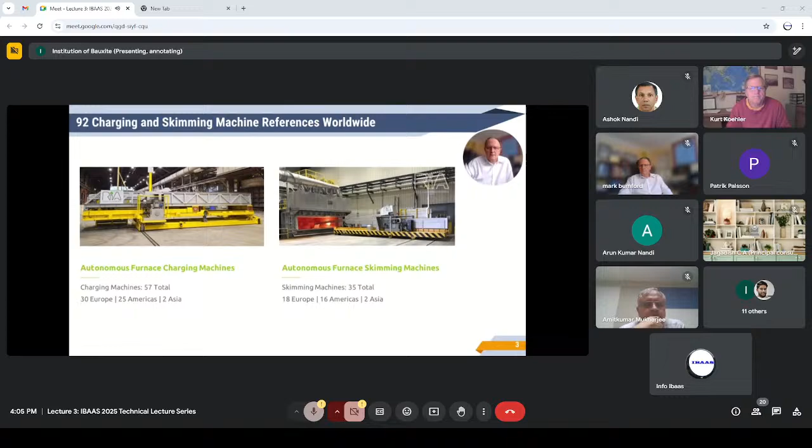Notably, some other large customers include Novelis, which is a downstream entity belonging to Hindalco, and Hindalco itself. We have supplied a furnace charging machine to the Hirakud plant, which next month will be installed and commissioned in the DC4 cast house. That's a swiveling charging machine capable of charging 12.5 metric tons into a furnace in less than 90 seconds.

Let's look specifically at the technology and how that relates to improved efficiency and safety. First of all, there has been no operator cabin on our charging machines since 2014. So for 11 years now, we've been supplying these charging machines completely automatic, without any operator cabin on the machine. That way we remove the operator completely from the dangerous and risky charging cycle, where there's always a risk of a potential splash, exposure to heat, or worse still, an explosion.

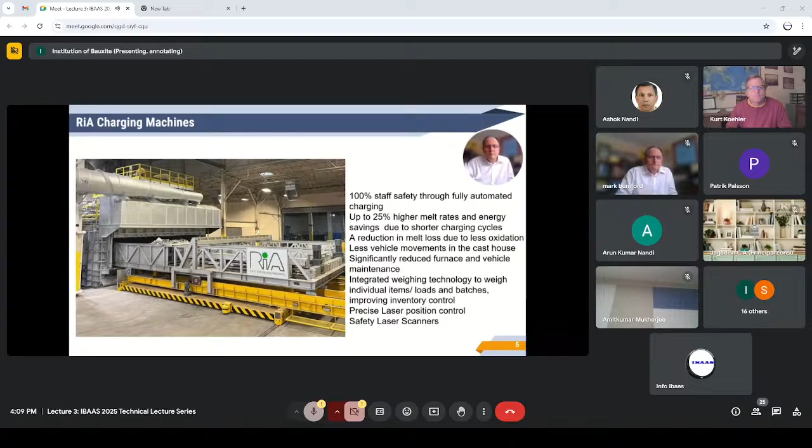Because the machines are automatic, they need to know where they are in the cast house in relation to the furnace or furnaces. So we have laser position measurement on the machines that determine where they are in relation to the furnace, so that we can ensure when we enter into the furnace, we're not touching the sidewalls, we're not touching the refractory. These are completely non-contact. We have safety laser scanners on the machine, so as we move up and down the cast house floor, if we approach an object or another vehicle or a person, the machine will slow down and ultimately stop if that object doesn't move from the path of the machine. So complete safety.

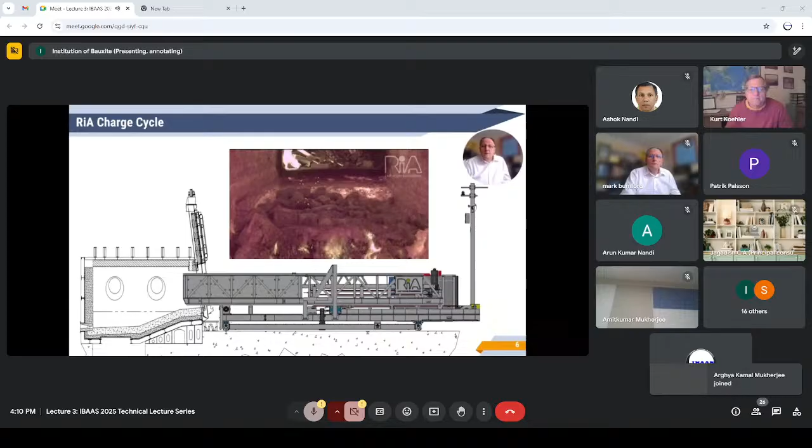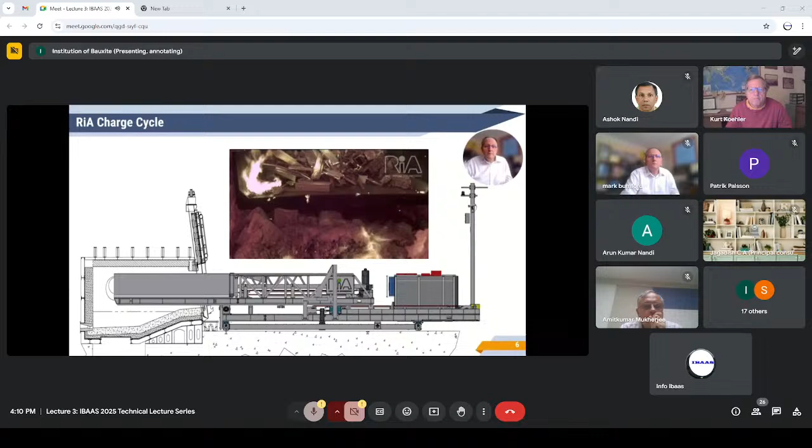This video here and the graphic are synchronized together to show you what a typical cycle looks like. The machine moves in front of the furnace, it sends a signal to open the door, it extends into the furnace to that 2/3 length of the furnace. Pusher plate moves up to a predetermined position, stops, and then our container retracts against that pusher plate. And as the container retracts against the pusher plate, the scrap's being pushed off into the furnace from the back all the way to the front. And we can do that always in less than 90 seconds.

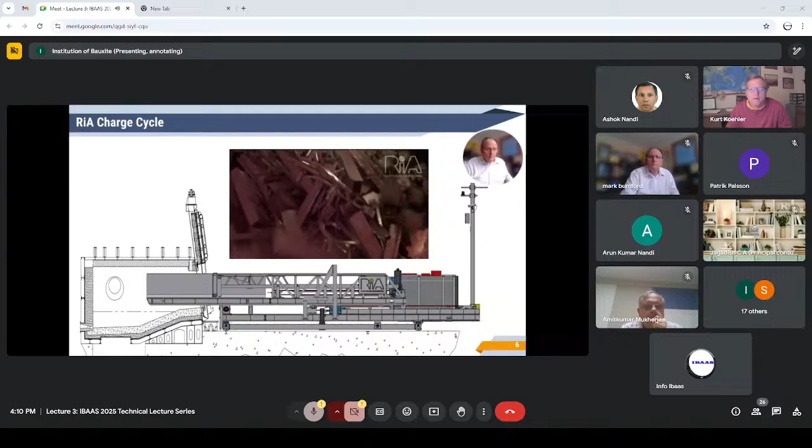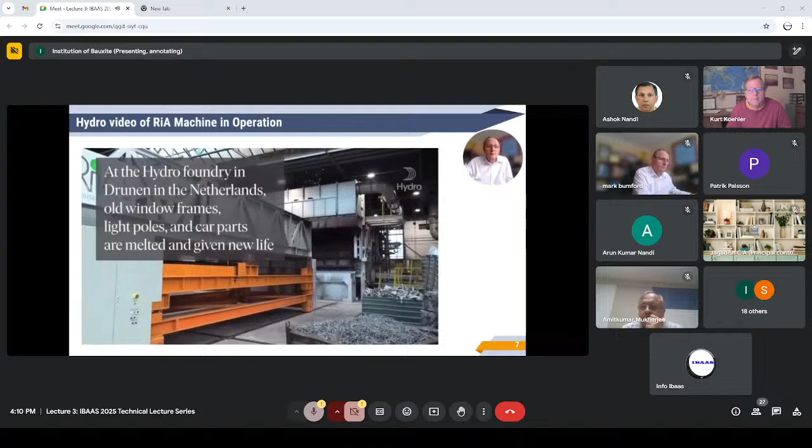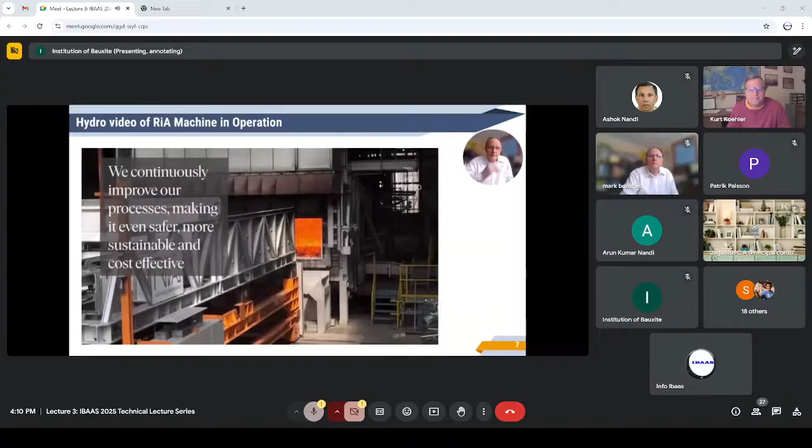Rather than showing you a graphic in operation, the important thing to note here is this is not a video made by RiA. This is a video made by one of our customers, Hydro. So the words that Hydro use are Hydro's words, not RiA's. So here they're talking about a circular economy. They talk about efficiency. They talk about cost savings, sustainability through use of that machine.

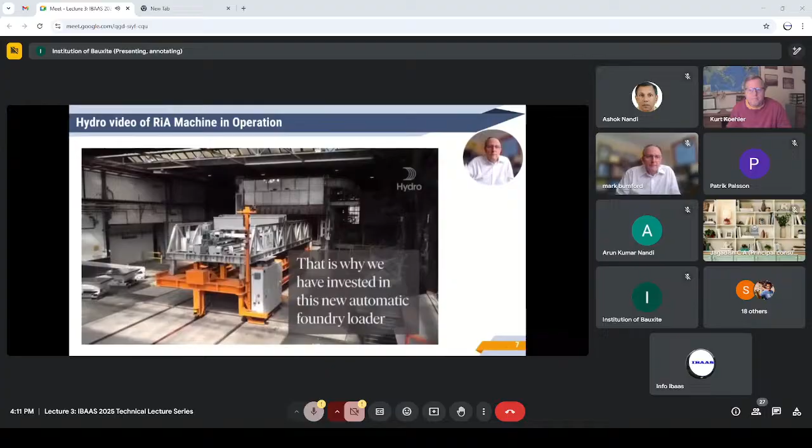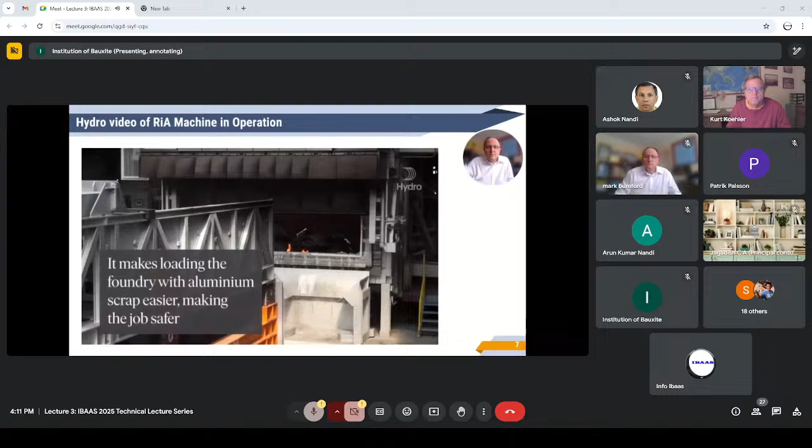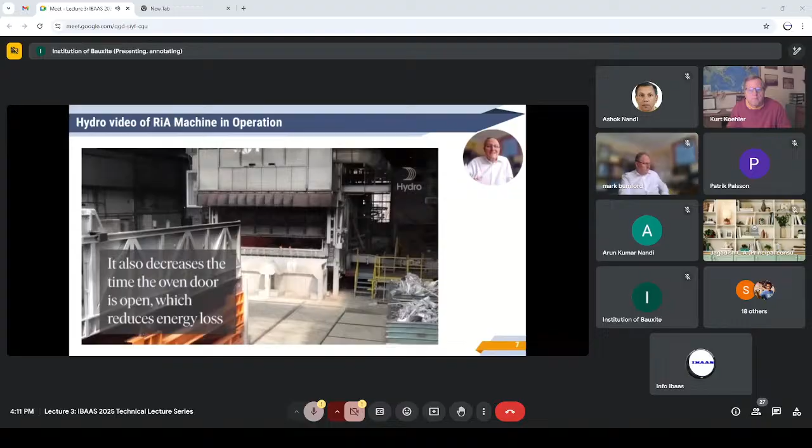Again, you notice that there is no operator cabin on the machine. It's fully automatic. We provide a remote operator station, and in this case the operator has a single push button that activates the machine. The machine moves to the furnace, sends the signal to the furnace controller to open the door. When it receives a signal back that the door is open, the machine extends into the door, into the furnace, delivers the load, retracts back out and returns back to the loading position, all fully automatic without further interaction from that single push button.

Just to show another application in operation, real-time video. If you want to time it, the cycle from when the charge container starts to extend now to when the container is back to that home position and the machine starts to move away from the furnace is 45 seconds. And in that time, this machine is capable of delivering 15 metric tons into the furnace. Now, if we can do that and we deliver the load evenly from the back to the front, we get that shallow scrap pile. We don't have a heap in front of the burners that are blocking the heat to the rest of the furnace.

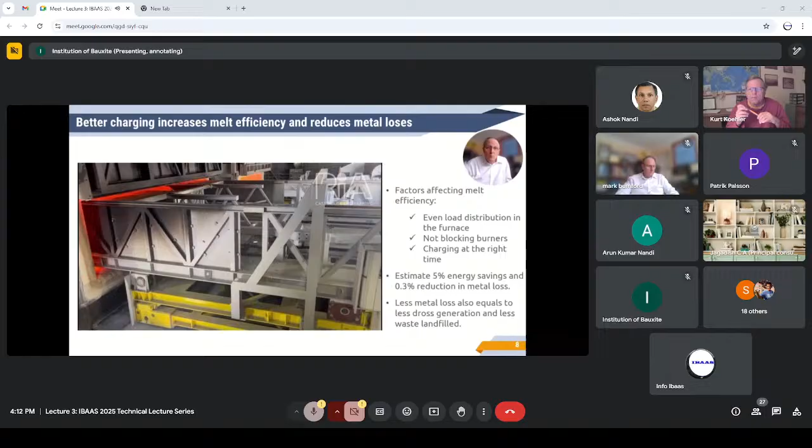We can use cameras inside the furnace, which I'll come to in slides to come, to actually determine when is the optimum time to make that charge. If we can do that, we can minimize the number of door opening times. We can minimize the total amount of time that the door is open per cycle. So we can keep heat in the furnace. We can reduce your cycle times. We can save energy. Here we estimate 5% energy savings by minimizing the door opening. A reduction in dross generation of potentially 0.3%. So if you're generating 2% dross typically, we could expect to see that fall perhaps to 1.7% just by minimizing that door opening and minimizing the amount of oxygen that can get into the furnace.

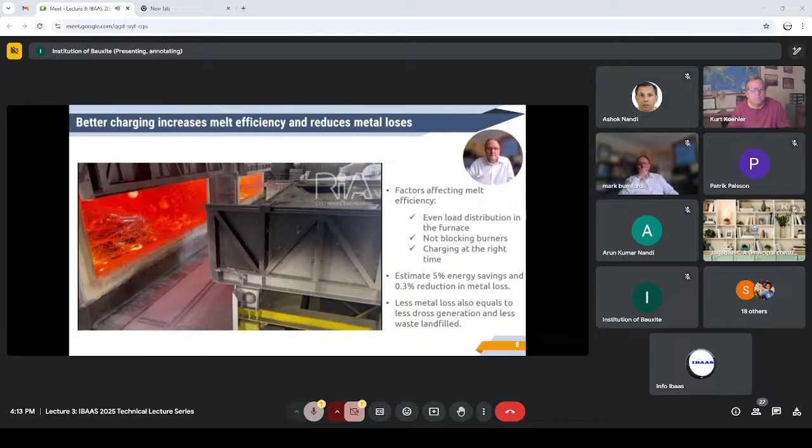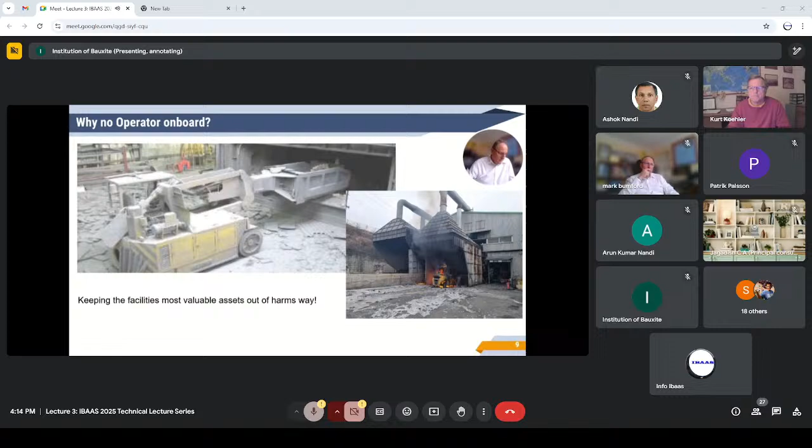I'll now talk about cameras, and then a little bit later we'll come back to skimming, but cameras here actually tie in and relate nicely to furnace charging and how we can take that automatic cycle from being automatic to autonomous. First thing to note is that Fioscope, since we made that relationship quite formal, the relocation of the business and for Ria to take over the sales of the Fioscope technology, we've sold 107 of those cameras worldwide since 2022.

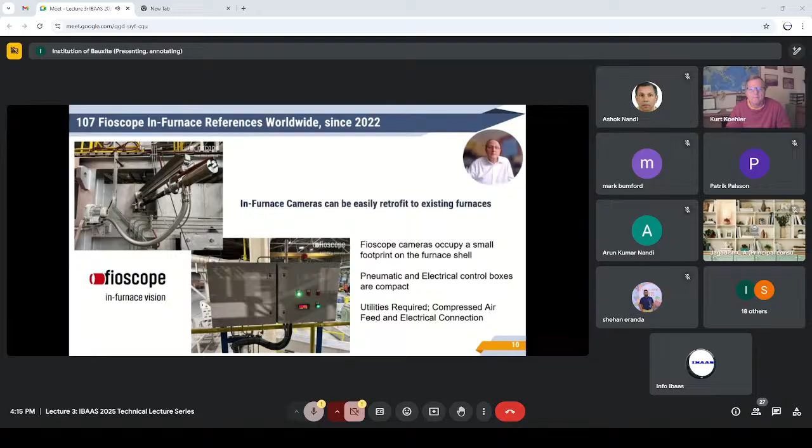Other significant customers include the likes of Hydro, where we secured one frame contract to equip every Hydro cast house in Europe that didn't already have a camera on their furnace. So at that time, 8 cast houses invested in Fioscope technology in different countries throughout Europe.

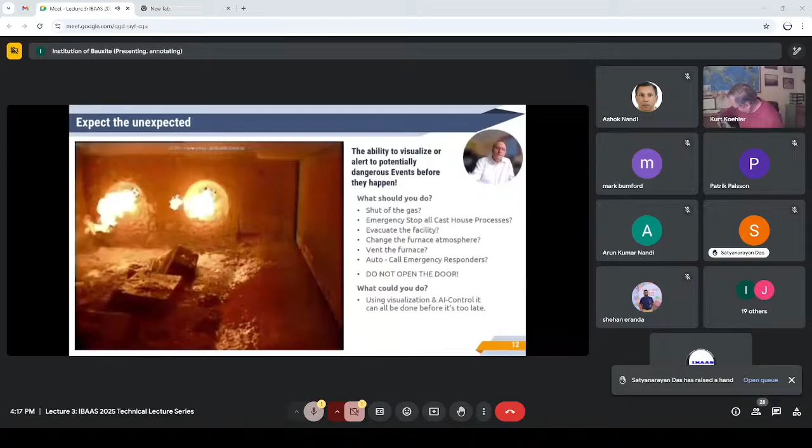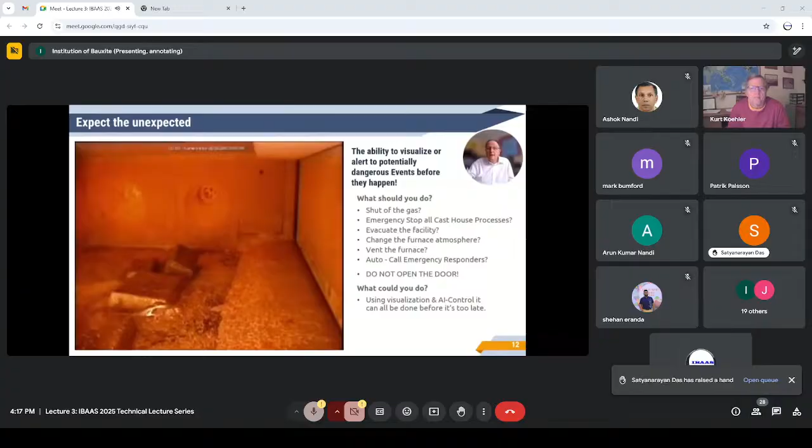This video was captured from our very first installation. The installation occurred in 2014. This video was acquired in 2015. We had a video storage facility, so we didn't know what was going to happen, but after the occurrence, we were able to look back to see why. You can see some bubbling just to the front right of that sow in the furnace, and that's moisture escaping from contraction within that sow.

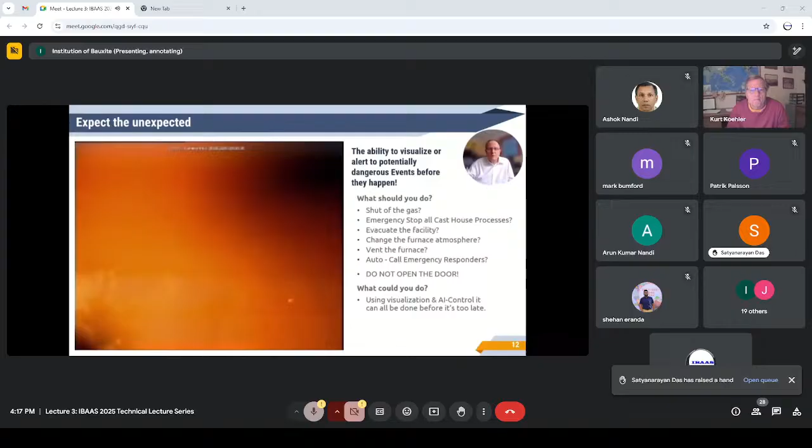And at a certain point, that moisture path becomes blocked. The theory is that there was a rapid rise in volume there and expansion, and that caused the explosion. Now, we were quite lucky, the customer was quite lucky, that that was a mild explosion. It was a loud bang, but the furnace wasn't damaged. Nobody got hurt in that particular incident. But it got us thinking, if a camera inside a furnace can see events, can you use that image to make decisions and take actions and maybe prevent such events?

Now, what was clear in this particular case is the image which was displayed on a monitor in the pulpit in the cast house had not been observed for certainly more than 10 minutes when that bubbling was occurring. Otherwise, the operators may have tried to take actions to prevent that occurring. What could they have done?

They could have certainly evacuated the area. At that time, nobody knew how significant the explosion was going to be. They certainly could have shut off the energy supply to the furnace so that there was no further heat being put in there. They could have called the emergency services just in case. So there were a number of things that could have taken place that may have prevented that incident from happening, or certainly reduced the risk of it being any more significant than it was.

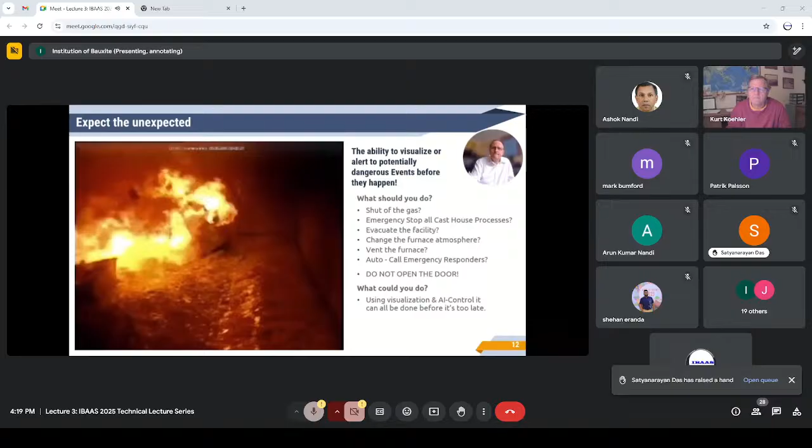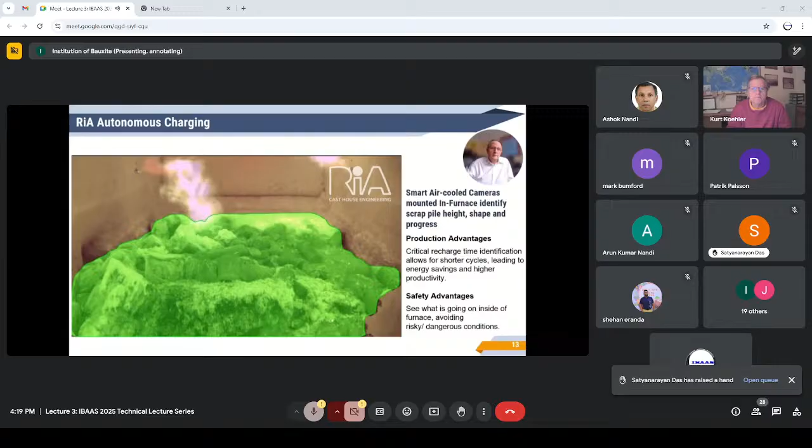Fast forward to today, this is what we use that camera technology for. So the green polygon that you see is the intelligence system identifying where the solids are inside the furnace. So it's ignoring the door and the wall and the floor. It's ignoring the burner flames. It's just tracking the polygon, the shape of that scrap pile.

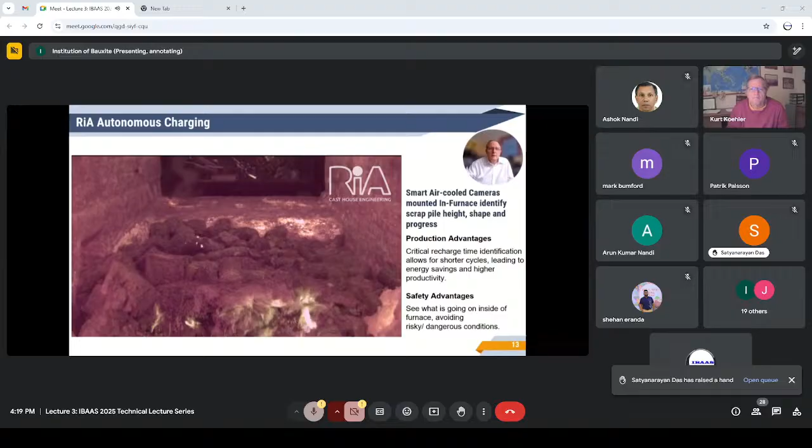Now we have a traffic light system. We're at the end of the cycle here where we're ready to receive the next charge. That's what the green light means. We're ready, we can go, we can proceed. So the door opens, here comes our charging machine, and in real time we just show that charging machine coming in and delivering the next load.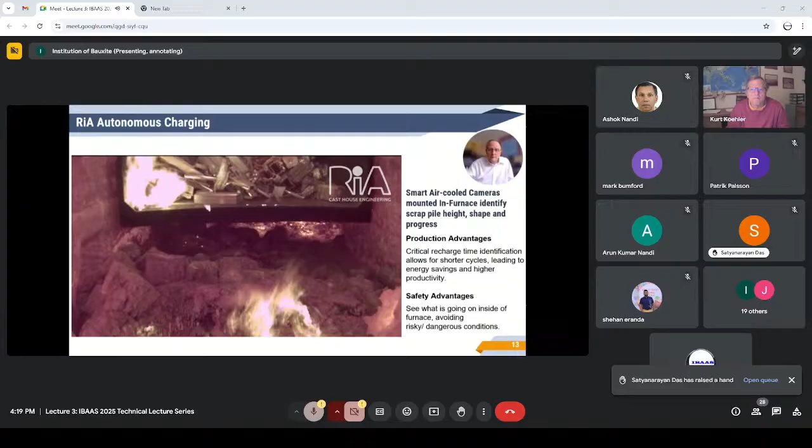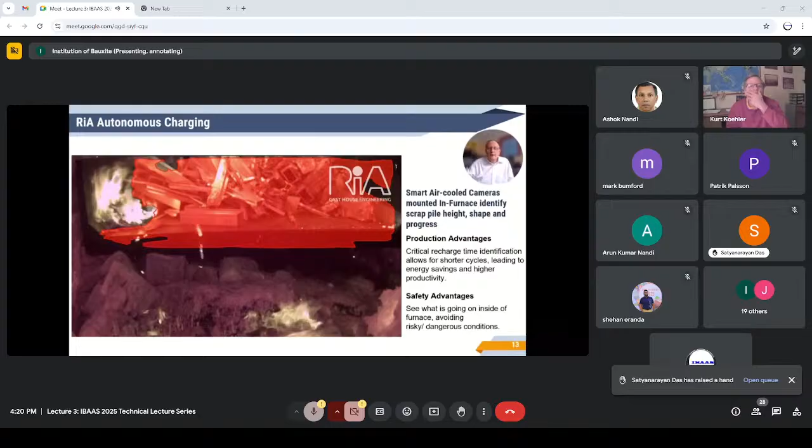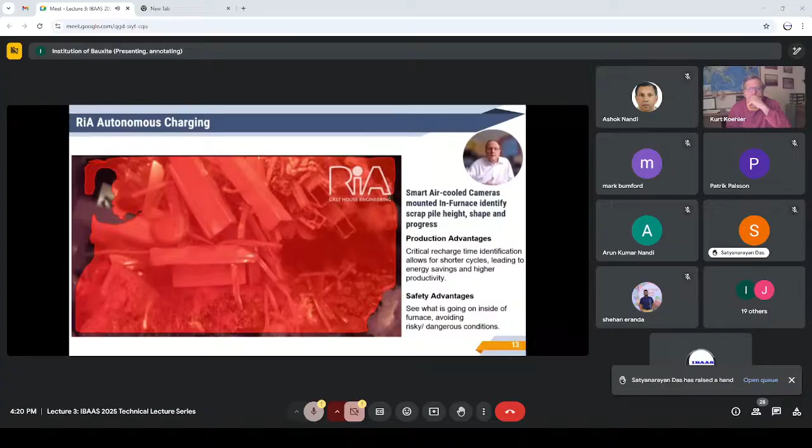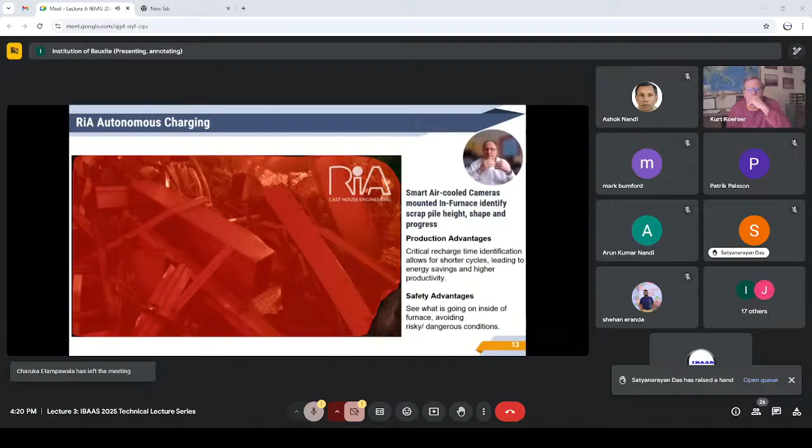So the first thing, as the intelligence is still rolling, it identifies the solids that are in the scrap container, links that to the solids that are in the furnace, and we now have a red polygon which says the furnace is not ready. So now we have the start of the traffic light cycle. So at the moment we're delivering the load into the furnace, and as I mentioned earlier, the charging machine is coming deep into the furnace and it pushes that scrap to the back of the furnace, to the front of the furnace. So we really make use of that space.

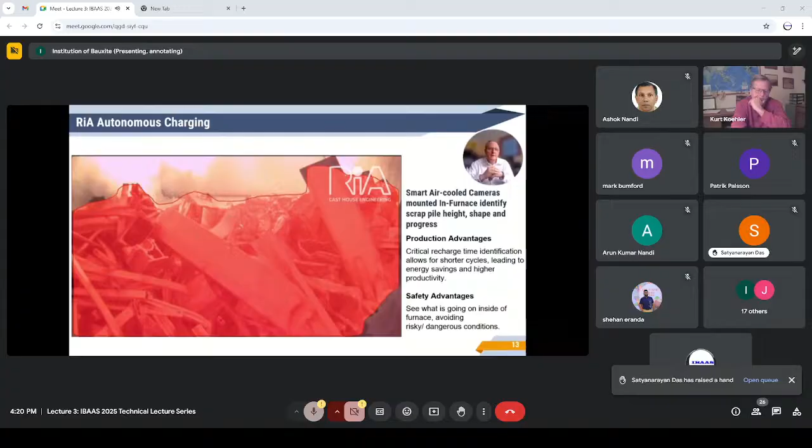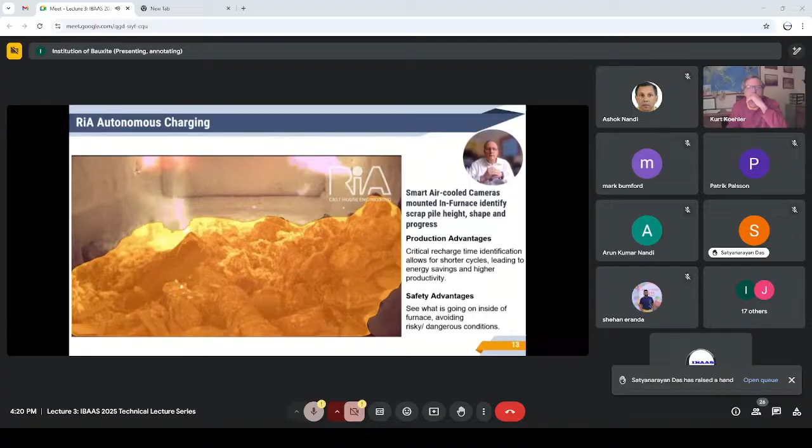Now we've sped up the speed here just so I don't have to talk or wait 10 minutes for this material to melt down. And as it melts down, you'll see we'll transition from red to orange, which means we're nearly ready, and then ultimately to green when that last piece of scrap billet drops down and is low enough to receive the charge car into the furnace to deliver the next load.

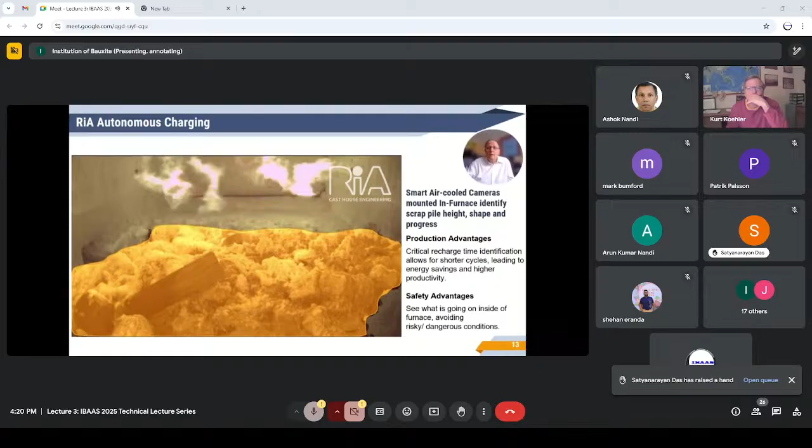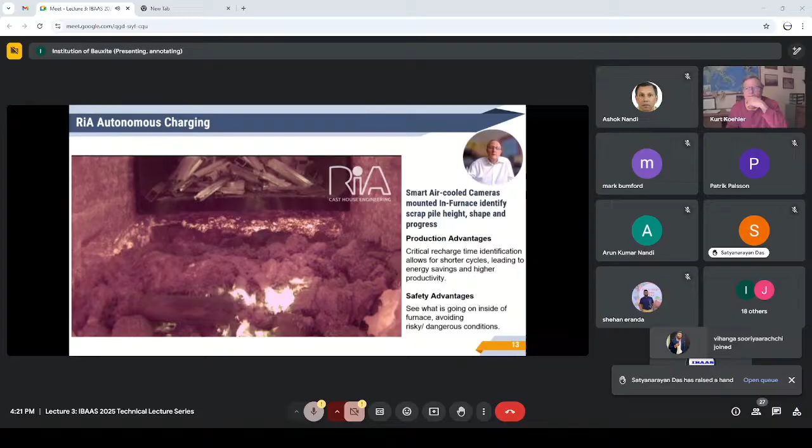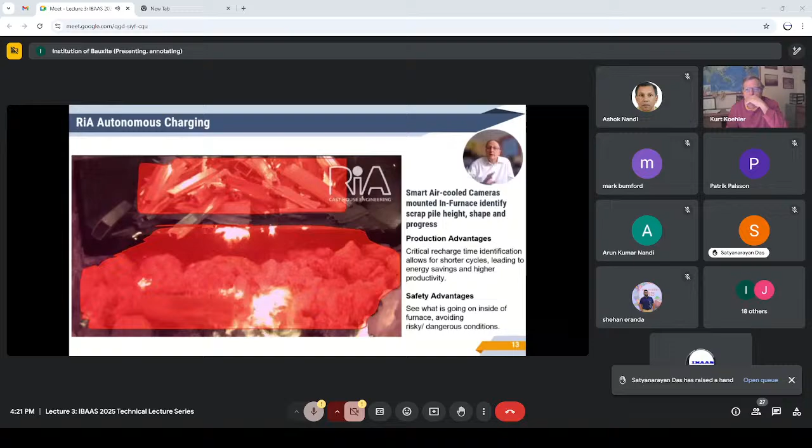So the cameras here now track the melting of the solids. Here we go in green, and they send a signal to the charge car, come and deliver the next load. So here we can take out the operator completely from the process and allow the cameras to determine when is the optimum time to load the furnace. Now that analysis has all been taken with the door closed, keeping the energy.

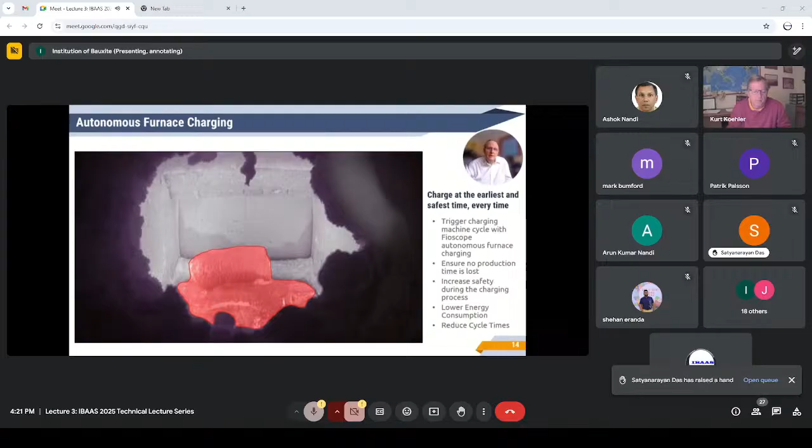I'll show another video that shows that as an example with some larger blocks here inside the furnace. Same thing, red, we're not ready, orange, nearly ready, green, we're ready. Now that could be the last stage of the cycle, flat bath. Now the furnace is ready for dedrossing, maybe sample taking, alloy additions, transfer to the next process or cast.

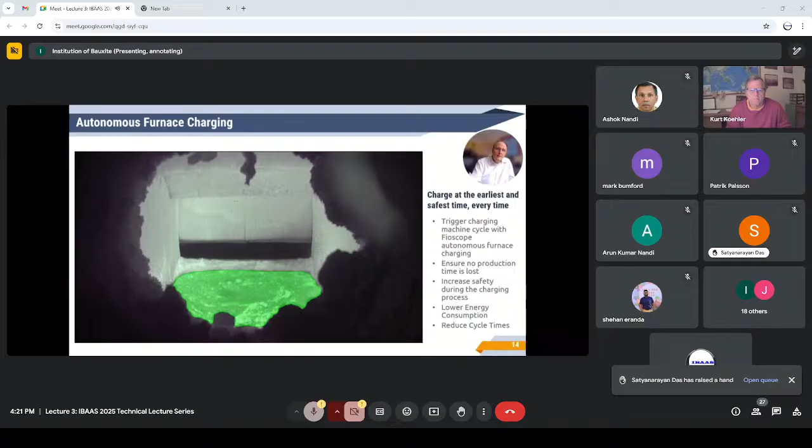Having taken the operator out of the process, here we see an example of a charging machine delivering a load, no operator cabin on the charging machine. There's a remote operator desk, but you can see nobody is driving it. This is fully autonomous. We have the cameras inside the furnace, which have called for the charging machine. The operator in the pulpit can observe everything, line of sight to the furnaces. We have cameras on board the machines where you can see what's in the charge container, how the charge machine is interacting with the furnace, etc.

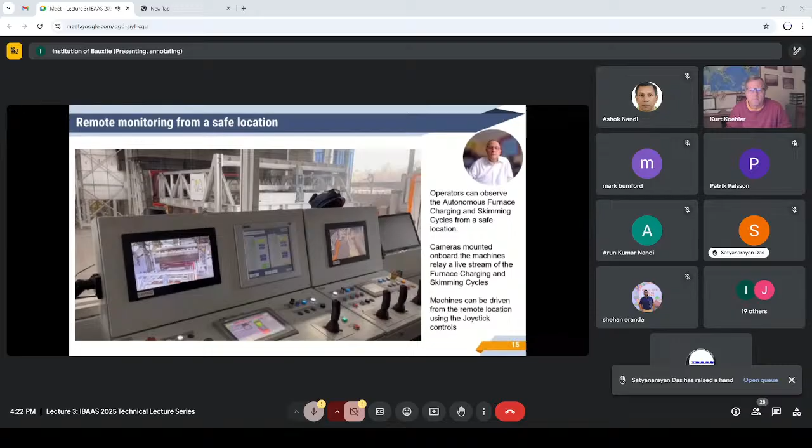And in the background, just behind the charge machine, we can also see a skimming machine. We'll come on to those shortly. But at the right-hand side of the desk, you have also the controls for the skimming machine. You may need manual control on occasions, maintenance purposes, or if you want to move the machine out of the way for other maintenance to occur, then you can do that using the joysticks and manual control. But otherwise, these machines are either, as a minimum, fully automatic or fully autonomous. You don't need an operator to be on the machine.

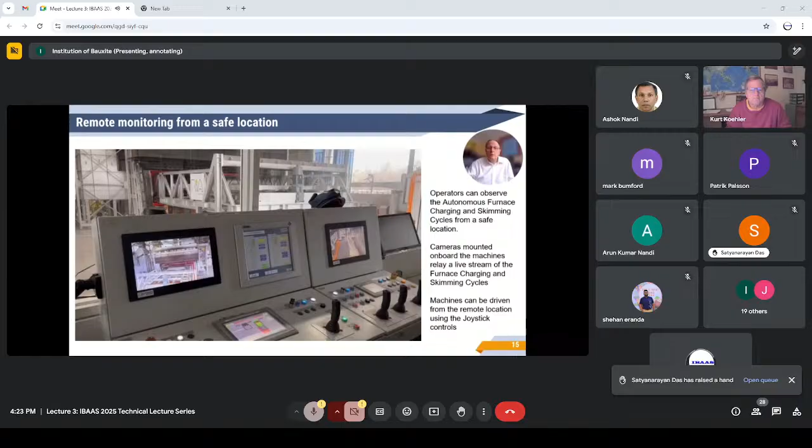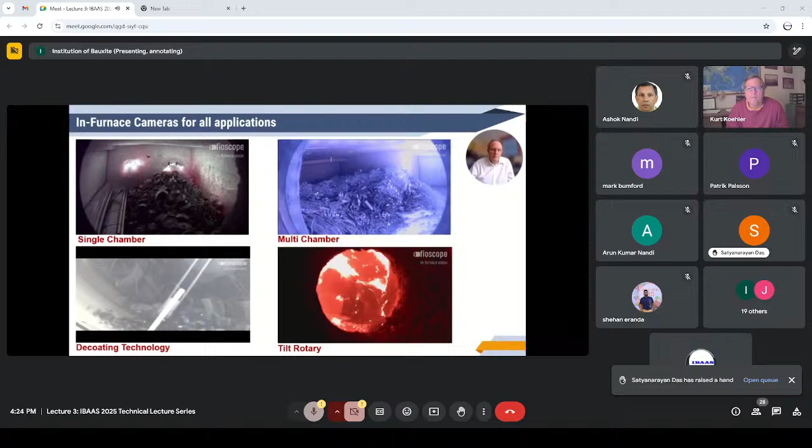And bottom right is inside a tilt rotary furnace where we mount the camera inside the door, very close to the solids, very smoky, very fumy application. But again, we have a view into the furnace, a view that is not possible in these applications without otherwise having to open the door and allow the heat and the energy out of the furnace.

Let's talk about skimming machines then. Skimming machines are not just purely for skimming. They are designed for skimming the dross off the furnace, but also mixing and stirring the furnace and cleaning the furnace, the walls, the floor, before alloy changes, for example, both for melting and holding furnaces.

Most of our skimming machines are supplied with an operator cabin on the machine, but that's not necessary today, and some of the more recent machines have been supplied without operator cabins. So again, if you wish to, you can keep the operator completely away from the machine, not have an operator cabin on the machine.

The machine can be fully autonomous. It can be operated manually as per the charge car from a remote location using cameras on board the machine, or it can follow an automatic robotic skimming pattern, or it can be fully autonomous, again using the same camera technology that we use inside the furnace and using the smart capabilities of those cameras to make decisions about where the dross is.

One thing to note about these skimming machines is that they are fully programmable. The PLC knows exactly where the skim boom is and therefore where the blade is in relation to the back wall, the side walls, the floor and the ramp. So we're not going to accidentally damage or contact that refractory, cause damage that requires further downtime and reparation work. We have applications where we put charging and skimming machines into new furnaces that haven't needed a major reline for 8 years because the refractory has been protected by the machines.

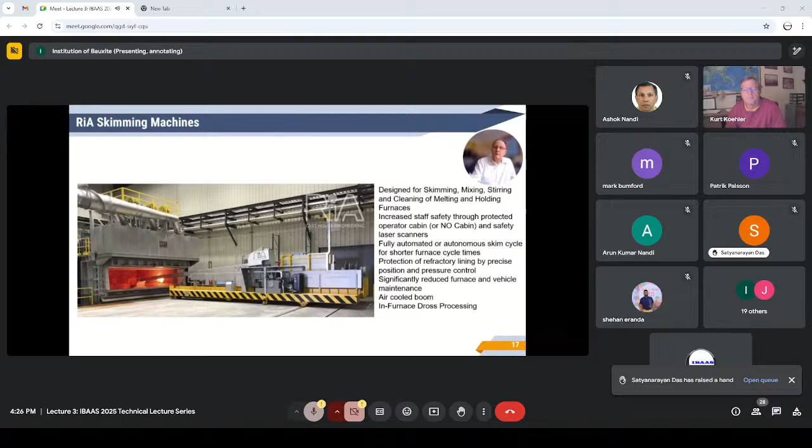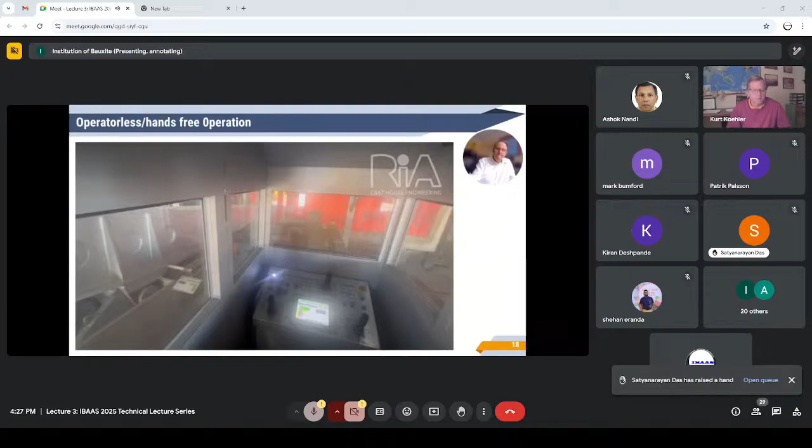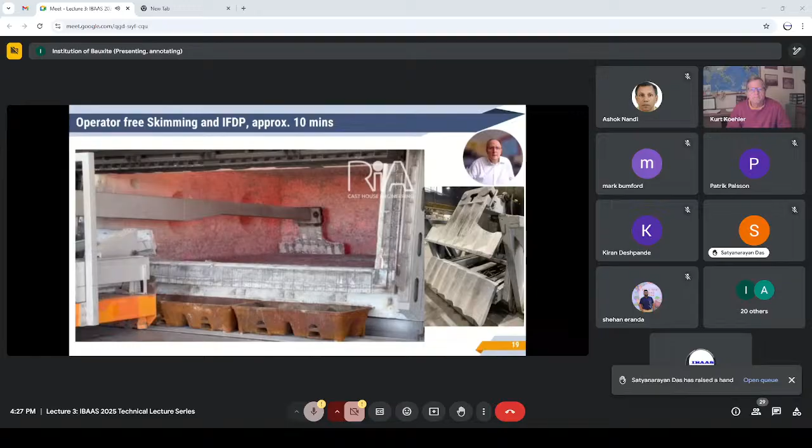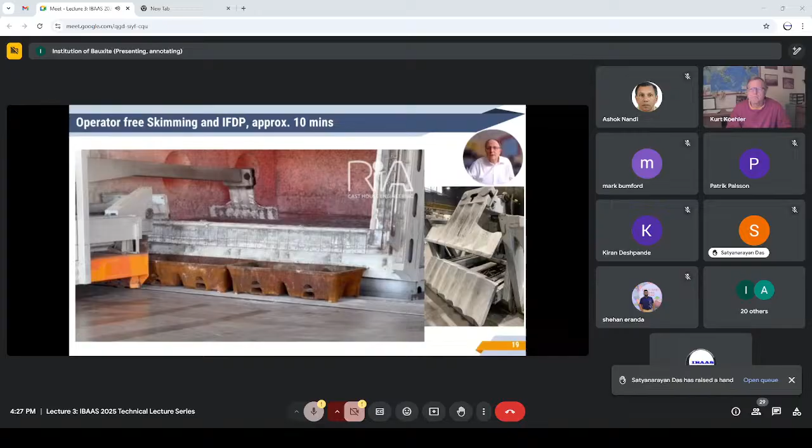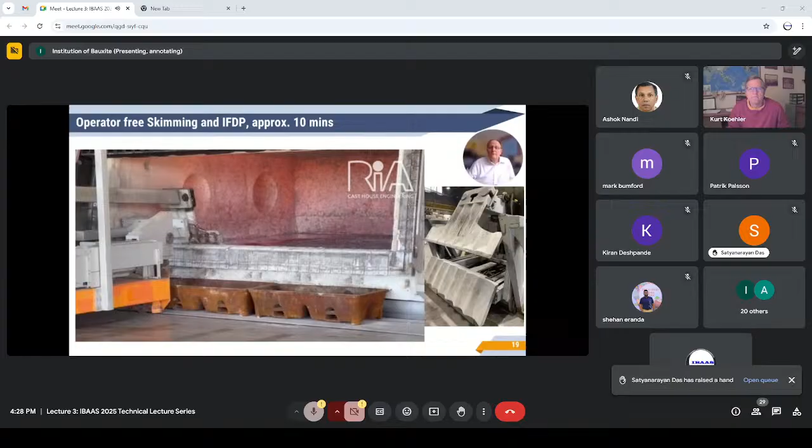So we bring the dross off the surface, bring it up onto the sill, press it for a predetermined time, and then there's a number of actions that we can take. Either we can lift that and allow the dross to drain whilst we're holding it back into the furnace, or we can take it out into the dross pan. In this application, as I mentioned, 10 minutes, start to finish, skim the dross, press the dross, remove the dross from the furnace, close the furnace door, transfer the liquid, go on to the next stage of the process.

That IFDP has been shown on 6000 series billet applications to reduce the weight and volume of the dross that's removed from the furnace by in the region of up to 35%. And that reduction in weight and volume relates to liquid which actually stays in the furnace and is available at no extra cost or immediately transferred to the casting lines as finished product with no additional energy or handling.

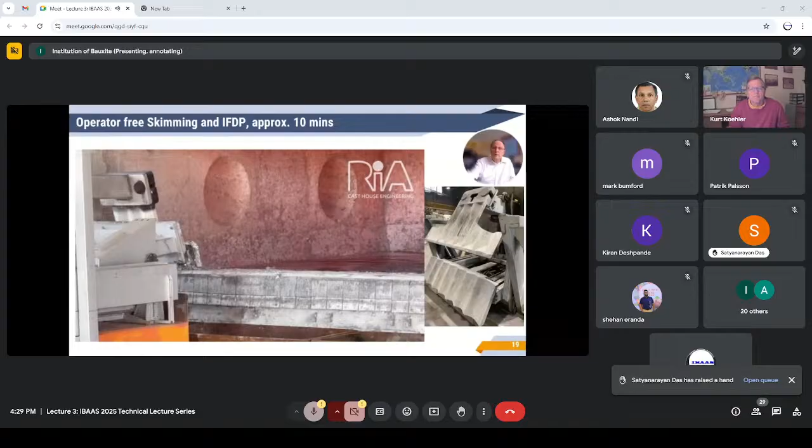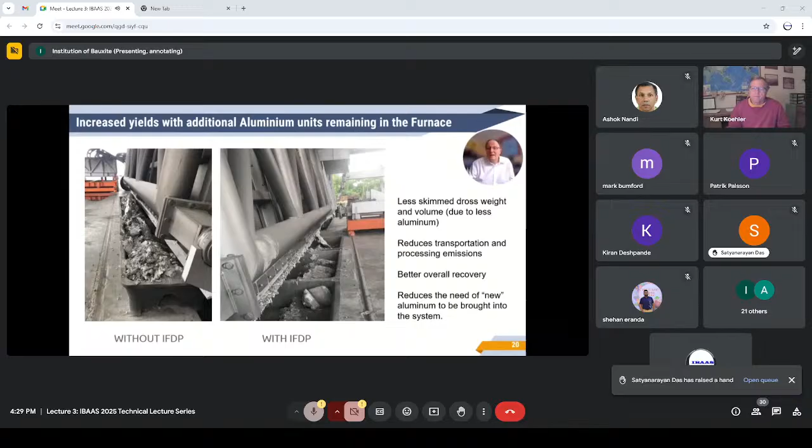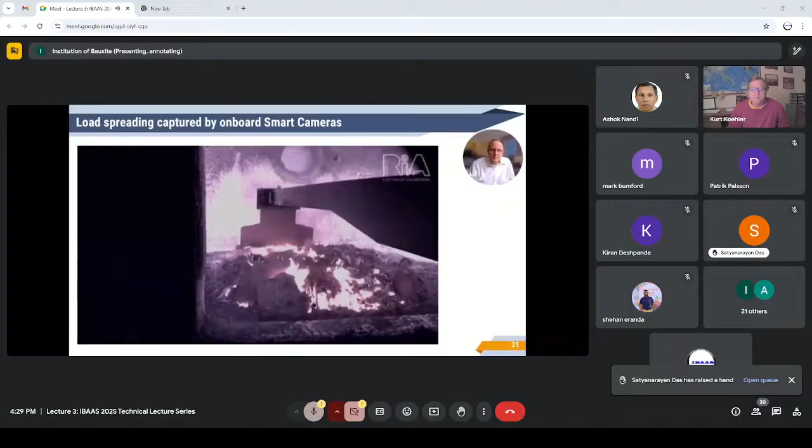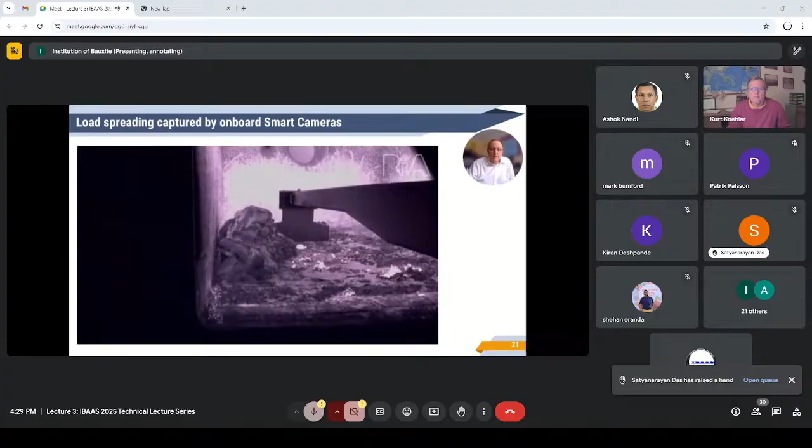Skimming machines are not just solely used, as I mentioned, for skimming and stirring and mixing. Not what they were intended for, but they often get used for load spreading, opening up the scrap pile, exposing the center of unmelted solids to the heat of the burners, lowering the scrap pile, which allows you to bring the charge car in sooner to move to the next stage of the cycle.

Or if you have an electromagnetic stirrer or another circulation device, you can get those solids down below the surface and let the movement of the warm liquid aluminium passing over those solids break down those surface barriers and increase the melt rates. So load spreading is another benefit from using these rail-mounted skimming machines.

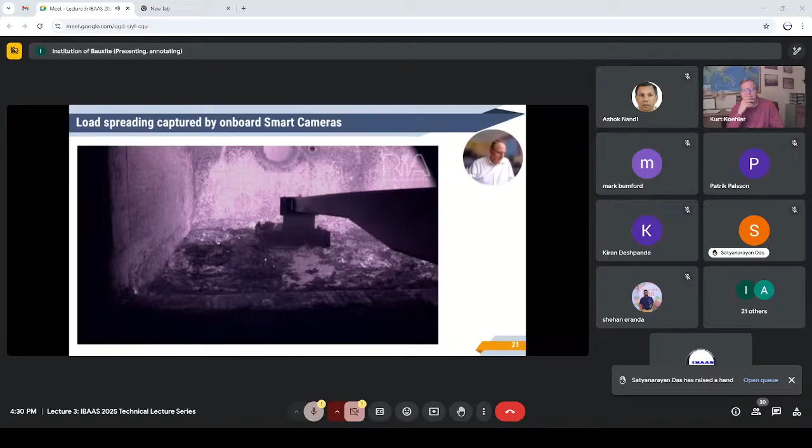Now the cameras that were on that skimming machine that captured that video that you saw are not actually there for that purpose. They're there to aid us for what we call autonomous skimming. So the cameras can identify exactly where the dross is located and then make an intelligent decision about how to skim that furnace. For example, if you have a circulation device that actually moves the dross from one side of the furnace to another, when you open the door, our cameras will identify that half of the bath surface is clean and therefore not waste time skimming that area. It would just go to the area where the dross is.

Secondly, if you have just a robotic skimming action where you skim lane by lane, a system that doesn't have a smart camera on board doesn't know how well it's done. So it completes the robotic pattern. It assumes everything is good and finished, but it may be that as you're skimming the next lane, dross may move into the clean area which has already been skimmed. A human being would notice that. He would go back and capture that dross and remove it from the furnace, but a robotic skimmer doesn't know that. Putting the smart cameras on, we can see when that occurs and we can make a decision about where to go back and when and how.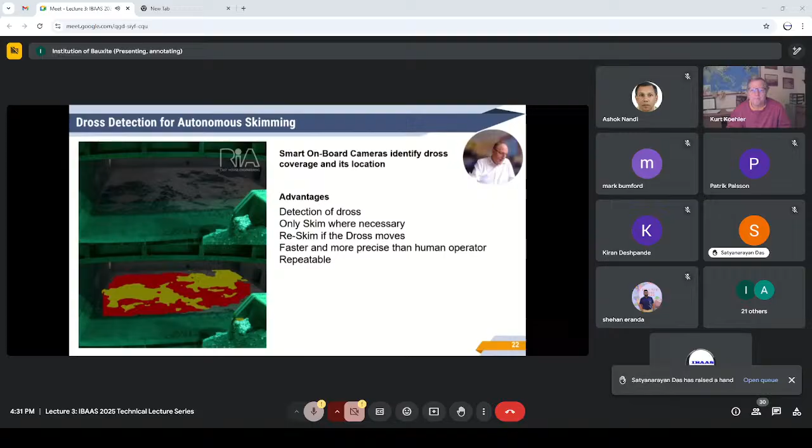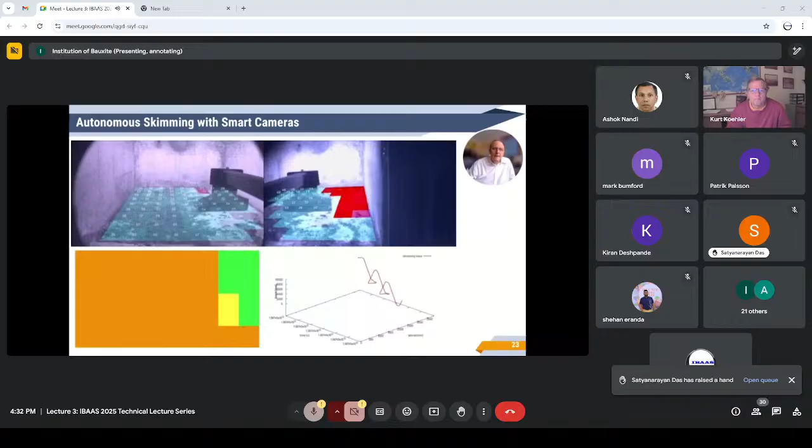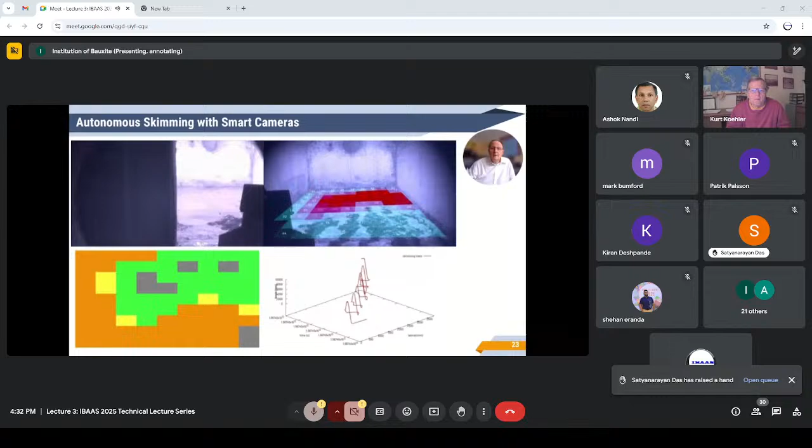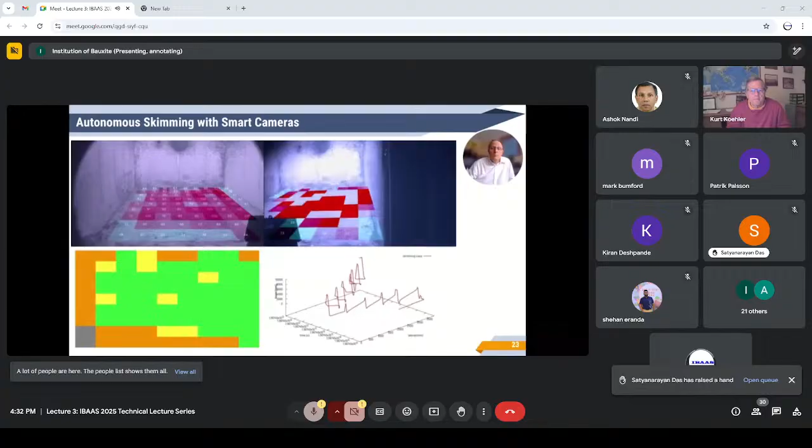Just to show that in action, you can see here we divide the bath surface up into a grid. We make decisions about the cleanliness on the grid, and then we determine where to put the skim blade to remove that dross from the furnace and how well the system is performing as that happens. And you'll see here that some dross has been left behind. We go back and we capture that and remove that. We redo the analysis in real time and determine whether the job is finished or not.

Okay, just a reminder as we're getting towards the end, what those products are actually providing for us. And the two things that I set out to try to bring across here were safety and efficiency. So increased plant safety by removing the operator from the process in the first place. It may be that you've operated plant for several years without accidents to operators who are driving mobile vehicles. But there's no guarantee that that won't occur in the future, just based on the fact it hasn't occurred so far. So improved plant safety by removing the operator, increased plant productivity by reducing the number of times the door is open and the amount of time that the door is open for.

I did mention earlier that we will guarantee that all of our machines, whatever capacity they are, will deliver the load in less than 90 seconds. And quite often today, that is sub 60 seconds, depending on the stroke and how far we need to go into the furnace and how much the container holds. Incidentally, the largest container that we've supplied to date is 30 metric tons. And we will deliver 30 tons into a furnace in a single push in less than 90 seconds.